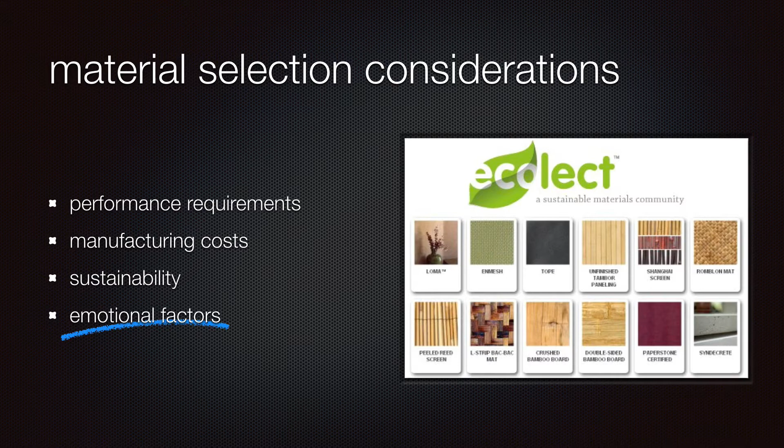Where do we find information about materials? There's some really great material libraries around the world, and lucky for us, these are connected to online databases which we can access through the QUT library. Material ConneXion is an excellent example of this.

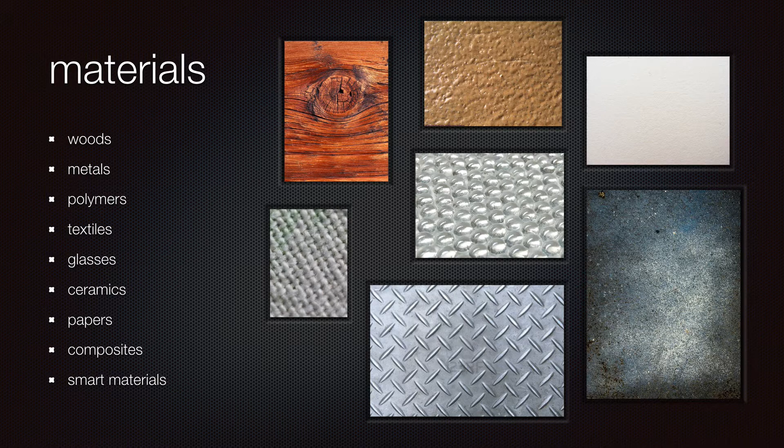In industry, we also rely on experiments as well as experts such as material scientists, engineers, and manufacturers. I'm briefly just going to talk about some of the materials listed.

First, let's talk about timber. This is familiar for most of us. Sourced from evergreens for softwood and deciduous trees for hardwood, it's easily shaped and formed, and is thought to be good for mass manufacture as it brings a one-off aesthetic and soul to the product. Add to this odor, coloration, texture, and structure, and most people find this a pretty engaging material.

Secondly, we have metals. These can be crafted or mass-produced in traditional and in new ways, using techniques such as casting, forging, pressing, and machining, and it's incredibly versatile due to its properties.

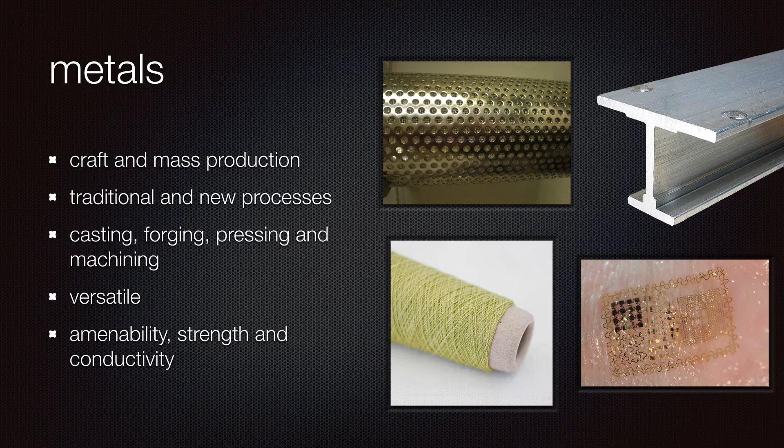Next, we have polymers. In many cases, they've actually displaced traditional materials due to their adaptability and versatility. They're able to mimic other more sought-after materials, and due to their flexibility and affordability, they're incredibly popular. Emotionally, they're fun, but, on the other hand, can also give a feeling of no commitment, which has its implications in terms of sustainability. For some, they're familiar and exciting, for others, perhaps mundane and uninspiring.

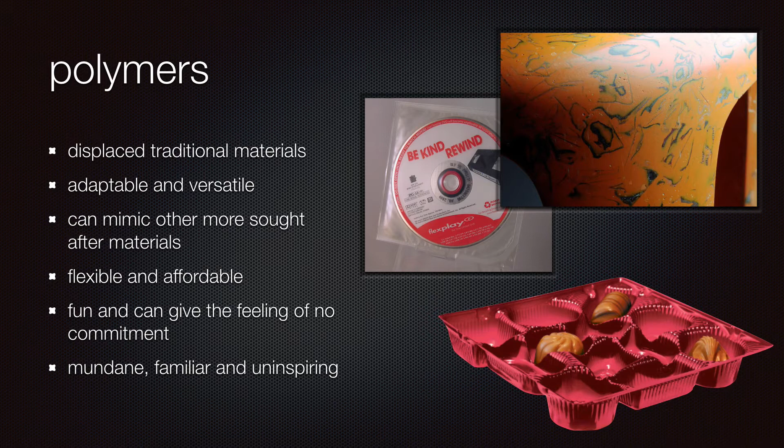Textiles can be both natural or man-made. They have a long history and tradition, but there's some really great contemporary approaches too, and they are quite versatile.

Glass is a really respected ancestry, but also some really great contemporary applications. Its positives are it's strong, enduring, stable, and almost totally inert. On the negative side, though, it's a little brittle in terms of its fragility. But this can make people care for it a little bit more, perhaps. It has a wide range of optical effects and can be produced through blowing, casting, rolling, drawing, moulding, and pressing.

Ceramic has both ancient and modern applications. With properties of both glass and metal, it's resistant to corrosion and decay, strong under compression, and extraordinary in terms of heat resistance. And of course, it's quite beautiful.

Paper's a little bit underrated and overlooked. It's a knitting of fibres that can be quite versatile, flexible, and elegant. It can be rigid and lightweight when laminated into a honeycomb structure.

Composites is another really exciting area of materials. It combines two or more materials with significantly different properties. Some of them are high-tech, but some of them aren't.

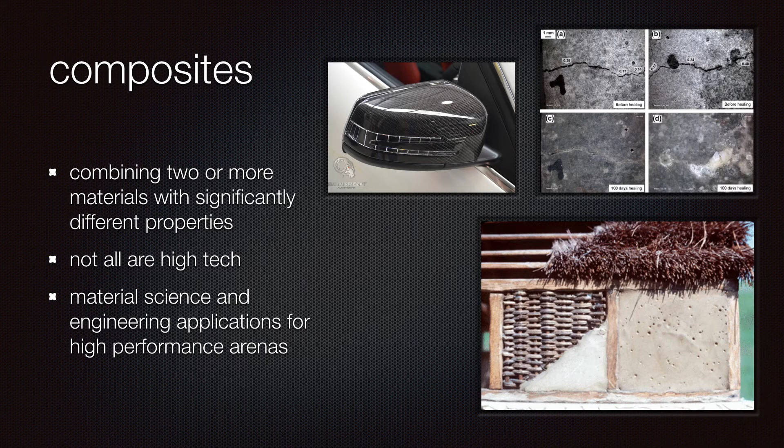Smart materials is a really exciting new field of material development. And of course, there's new materials coming out all the time, some with applications in mind, and others which don't have applications just yet. And this just means there's lots of room for innovation. Biomaterials can be included in this. And of course, when we think about smart materials, most of us think about it as being an additive rather than a subtractive manufacturing process.

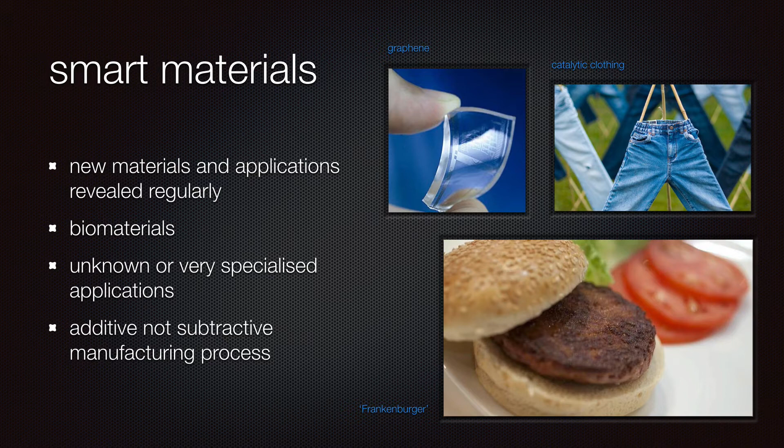So do you choose one material, or do you choose many? When it comes to choosing single components, this can be the difference between failure and success. You need to consider the overall aspects as well as the individual components.

One material per product can be elegant, it can be easier to recycle, it can be easier to manufacture, it can allow for greater physical exploration and pushing the boundaries, and it can also allow you to better play to the strengths and subtleties of that material.

Van Kesteren, Karana, Hekkert, and Kandachar said that understanding consumer experience in creative phases of design can benefit designers, especially the understanding of intangible aspects of materials. And the earlier we think about these things in the design process, the better.

Emotions guide, enrich, and ennoble life. They provide meaning to everyday existence, and they render the valuation placed on life and property. For centuries, humans have sought to create functional and decorative artifacts that have increased the quality of life and brought pleasure to their owners and users.

So, when we look at these emotions, and there's many of them, do we associate them with materials? Do we associate them with products? Products can have many different meanings for us. They can give us a sense of personal identity. They can give us experiences or show off the experiences we've already had. They have sentimental value. They remind us of loved ones, our wealth, our status, our achievements, and our security.

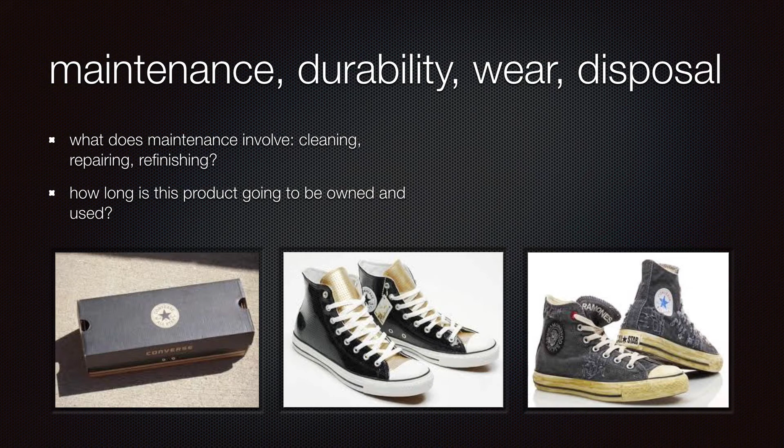With the maintenance, durability, wear and disposal of the material, what considerations do you need to have? How often is it cleaned? Is it going to be repaired? Is the user going to enjoy refinishing it? And how long do they want to keep it? How long do they actively want to use it?

What are a product's physical characteristics? Right from when it's bought, through all its stages of uses, through to the time that it's disposed of. And how does it actually get disposed of? Is the user left feeling satisfied or a little heartbroken?

We need to remember that we're evolving as consumers all the time, and that our interactions with objects are of course going to change as a result of that.

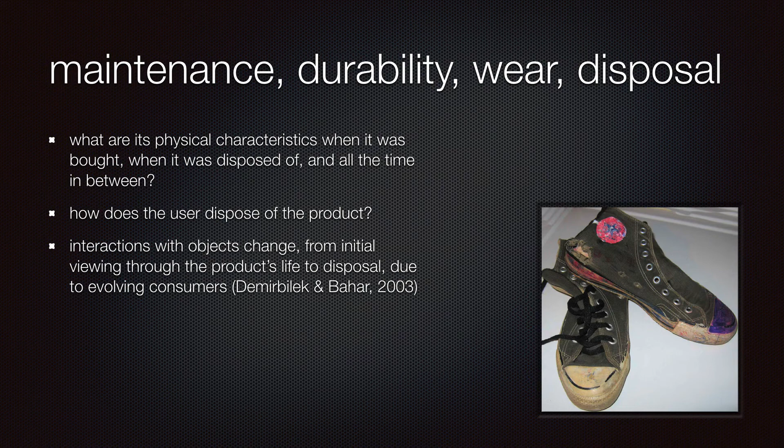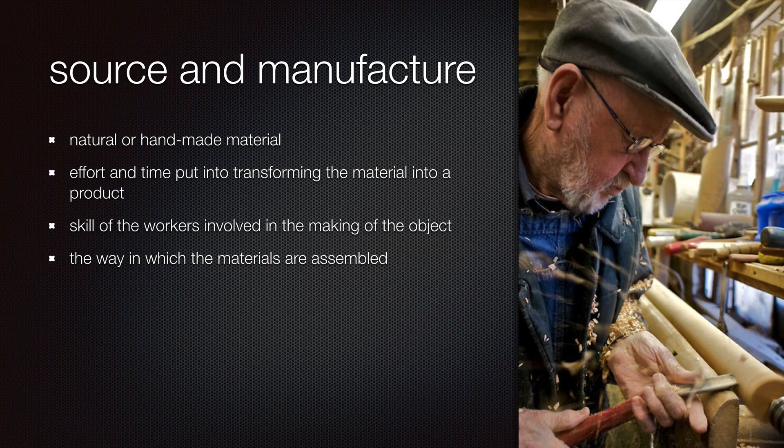One of the really interesting things we need to think about is not only the material, but how it's then manufactured. Is it handmade? Is it mass manufactured? How much effort and time is put into transforming the material? Does this come across in the end product? Can we see the skill of the workers involved and the way that it's been assembled? This will all add to the emotional experience.

So we've covered quite a lot today, and we need to think about all of these aspects when we're designing and choosing our material selections. It's a lot to think about, but hopefully this gives you a little inspiration to get started.